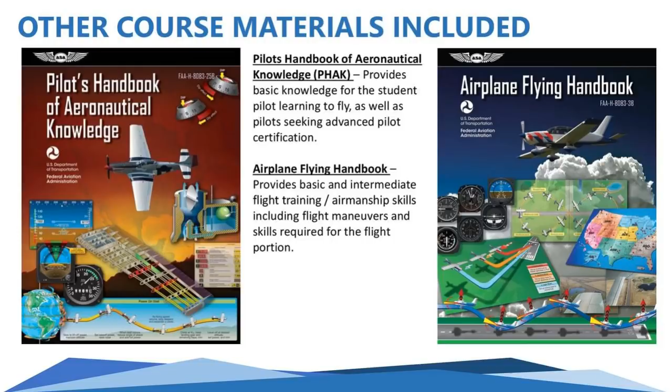Now, for those of you that have been outside of aviation for a long period of time, things have changed, obviously. We've got the wonderful world of GPS that is very, very prevalent nowadays, especially on the instrument side of things, but we do have these things called electronic flight bags. So back in the day, everybody had to carry around all these paper charts, and the charts would expire every 28 days or 6 months, depending on the different types of charts. And you'd see all these airline pilots carrying around big leather briefcases in the airports, and that's really no longer the case. When I was working at Compass, everything that we did was on an EFB, and the EFB basically gave us all of our charts on an iPad, right?

So this gives us all the information on VFR and IFR taxi charts. If you guys or gals have this, you can use this for this course. Once again, it's not a requirement. This is just the direction that the industry is going. It basically gives you the same, if not better, technology than what the airlines currently possess in terms of navigation and situational awareness. It also provides an electronic version of your logbook if you want one. And remember that ForeFlight is an Apple-only app. If you guys are non-Apple users, you can look up Garmin Pilot, which is the equivalent on the other side.

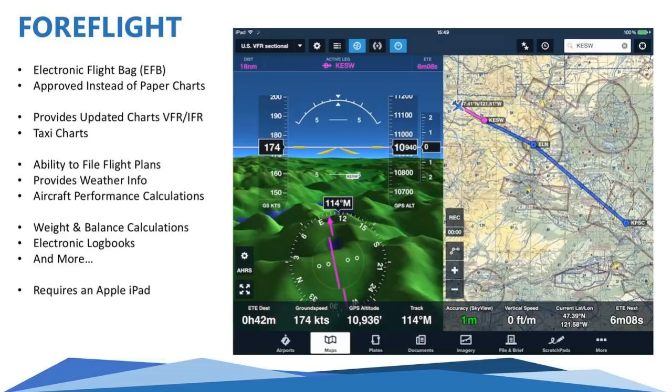That is the purpose of this class. Pass a knowledge test with a score of 70% or better. So once you guys receive that written endorsement, then you can go to an approved testing center, take that test there, and then once you pass the FAA test, those results are valid for 24 calendar months. So that means you've got 24 months in order to finish your flight training and take your check ride. If you don't finish it in that time frame, then you're going to have to retake that test.

Now, for the FAA written exam, my endorsement does not expire once you get it. So if you're a little bit younger, I know we've got some 11, 12, 13-year-olds in the class, just hang on to that certificate. And once you guys are old enough to sit for the FAA exam, then you can take it. Or if some of you guys are going to potentially start flight training a little bit later, or you want more time to study for the course, then you can take it at your leisure at another point in time.

So that's the differences between the two different types of schools here in the United States. The next thing I want to talk about is the ACS. The ACS is known as the Airman Certification Standards. This basically will tell you, the student, the instructors, and the evaluators what you must know and what you have to consider in order to pass the knowledge test and also the oral and the practical exam. Okay. So it's going to include 3 different areas. As we can see here, we've got the knowledge component, a risk management component, and a skills component.

Now, a lot of people don't understand how this works, but basically there's different objectives, and I've included a PDF copy of the full Airman Certification Standards on the website, so you guys can take a look at it. But this is how you're graded, right? So these are the things that you need to know. The way that it will work on your checkride is that the examiner will choose 1 knowledge, 1 risk management, and all of the skills, and it's really up to the examiner. Usually they're going to choose all of the risk management.

Okay, so what that might look like is, tell me what the privileges and limitations of a private pilot are, and then you would have to figure out how to explain that to the examiner and what they're asking for. And it says apply requirements to act as PIC under visual flight rules in a scenario given by the evaluator. All right, so there is no mystery in terms of how you're tested or examined by the FAA.

All right, now let's talk about those wonderful FAA medical certification requirements. So they suggest that you do get a medical prior to diving into flight training. Now remember, this is a free course, so there's really no obligation, but before you start spending a lot of money in flight training, I would recommend that you visit and get an FAA medical to make sure that you don't have any issues. You don't want to spend a few $1,000s and then realize that you can't fulfill your dream because something does come up.

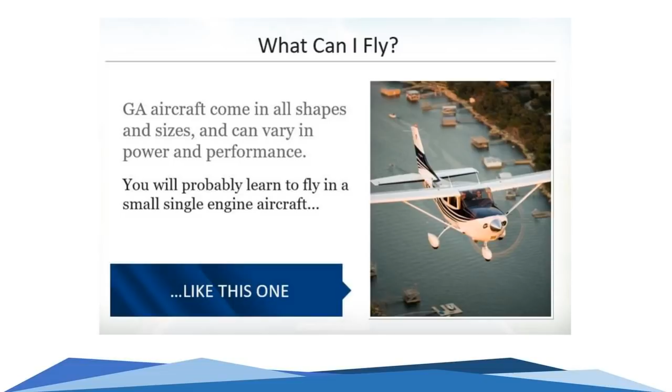All right, so what can you fly? So keep in mind that general aviation aircraft come in all sizes. Everybody here will probably learn in a single engine aircraft. This is a single engine land, meaning it can land on land. They also have versions of single engine sea, which would be a seaplane. In addition to that, if you've got the dough, you can do something faster like a Pilatus, right?

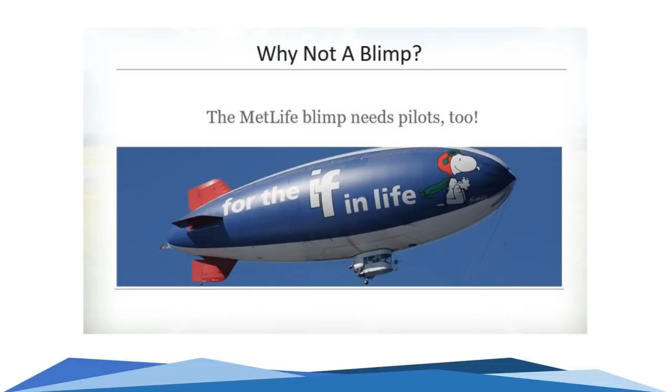And it's the same license, you just need some additional training or endorsements, which we'll talk about in the regulations section. Or if you want to fly a little slower in life, you can do the MetLife blimp, right? The blimps need pilots as well. And that's a different type that's called a lighter than air license. The other licenses and ratings that are available to you, and this is the general order most people would proceed. We are all here for the private pilot or some version of the private pilot or sport pilot. The private pilot allows you to fly.

The instrument rating allows you to fly in the clouds in sole reference to your instruments. The commercial, that's when you can actually start getting paid for what you do. If you have any inkling of teaching, that is the CFI, the Certified Flight Instructor. Now, to get from private pilot to commercial, you need 250 hours of flight time. There is no hour requirement for certified flight instructor except that you have your commercial. Now, for those of you that do not like teaching, just don't become a flight instructor. It's not worth it. You're going to do a disservice to the students unless you enjoy this.

All right. If you want to fly as pilot in command for any airline, Southwest, Delta, American, anything in between, UPS, FedEx, you're going to need what we call an ATP, which is an airline transport pilot license, which is what I have. And it's a minimum of 1,500 hours in order to get that. Now, once you get your commercial, most people are not paying for the flight time. That's when they're actually getting paid by a company in order to do that.

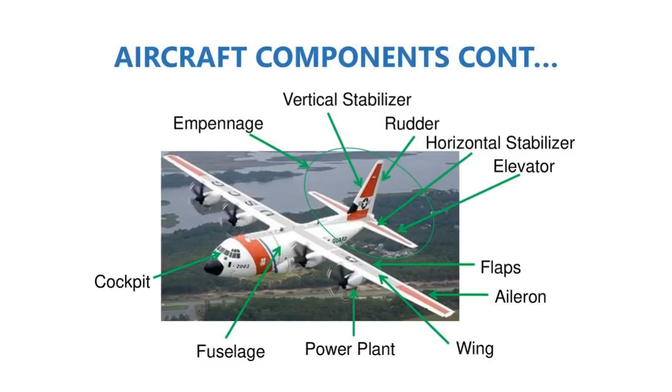Now, the way that these work in terms of a 3-axis system is we call this roll, yaw, and pitch, all right? So there's 3 different axes. There's the longitudinal axis, the lateral axis, and the vertical axis. So our wings, when we're rolling in a rolling motion, it is controlled by our ailerons, all right? So when we move the yoke right or left, it moves the aileron up or down, and that basically allows us to turn to the right or to the left, or what is known as roll.

When we look at pitch, which is basically pointing the nose up towards the sky or down towards the ground, we use our elevator, which is at the very back. Our elevators are located right there in the back along the horizontal stabilizer. And the ailerons are located on either side of the wing on the actual wing itself, okay?

Then the final axis is our vertical axis, and this controls yaw. So this is our rudder, and our rudder is along our vertical stabilizer as shown, and it moves in a yawing position. It kind of moves right and left, but it's slightly different in the way that it acts, all right? We'll look at each one of these in more detail here, okay? So let's look at those.

As mentioned, let's look at the first one here, which is going to be our pitch. So what we have at the very back of this is our horizontal stabilizer. And there's a little, it's called an elevator. And as we can see here, this elevator in an up position or a down position will basically pitch the nose of the aircraft up or down.

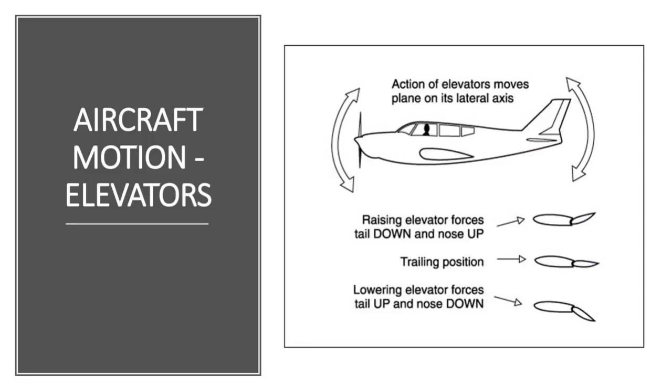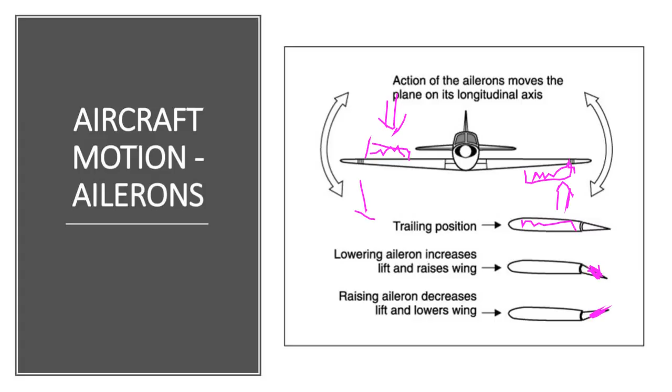What ends up happening is on the opposite side of the wing, remember that they are counter to each other. So if one is fully down, the other side is up. And when it's up, it's actually decreasing the airflow over the wing, which means it loses lift. So what's ending up happening is there's more lift on this side of the wing right here, and there is less lift on the opposite side of the wing, which basically makes this wing drop down and this one go up, okay?

The last one that we're going to look at is the rudder. So this is a top-down view of the rudder.

And yep, Glenn, you can use port or starboard if you really want to.

The rudder is giving us that yaw position. So the rudder, it's difficult to see, but the rudder is situated right here. And if we were looking at it, the rudder will deflect in the neutral position. It basically sits perfectly neutral and straight back. We can deflect the rudder right or left, and we do this by using our foot pedals. And if we basically step on our right foot pedal, then it will move the rudder to the right, and so forth. And then it will give you that opposite force.

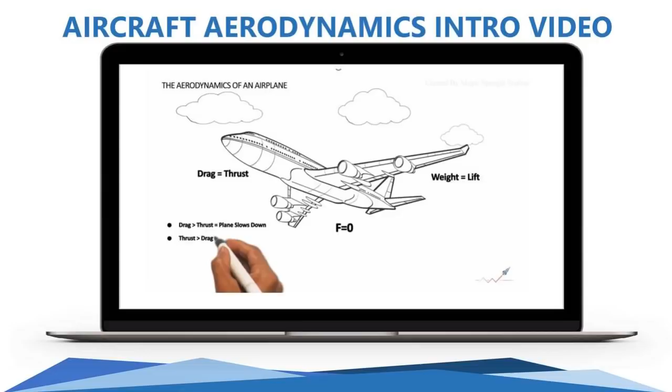Okay, so that's basically keeping us coordinated, which we'll talk a little bit more about in future lessons. But we don't really talk very much about how to fly an airplane. That's the general controls of the airplane. All right. So with that, before we actually dig into the aerodynamics section, I'm going to give you guys a very easy 7-minute video here. It's going to talk about the basics of aerodynamics, and then we'll dig into it and talk about it in more particulars. So let's go ahead and throw that up.

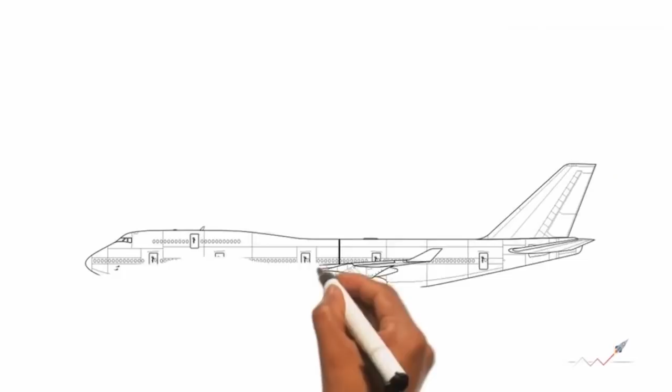If you have ever flown on an airplane, you know that it's an enormous-sized, amazing machine. A typical 747 can carry more than 500 passengers and weighs around 800,000 pounds when taking off. Yet it rolls down the runway at a speed of 290 kilometers per hour and, as though by magic, lifts itself into the air and can travel up to 13,000 kilometers without stopping. Incredible, isn't it? Today, we are going to learn how an airplane flies in a very simple way by going through the aerodynamics of an airplane, the main parts of an airplane, and controlling the airplane. The aerodynamics of an airplane. The 4 aerodynamics of an airplane are drag, thrust, weight, and lift.

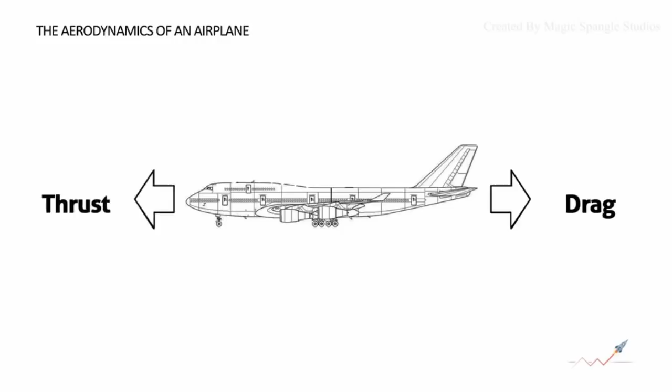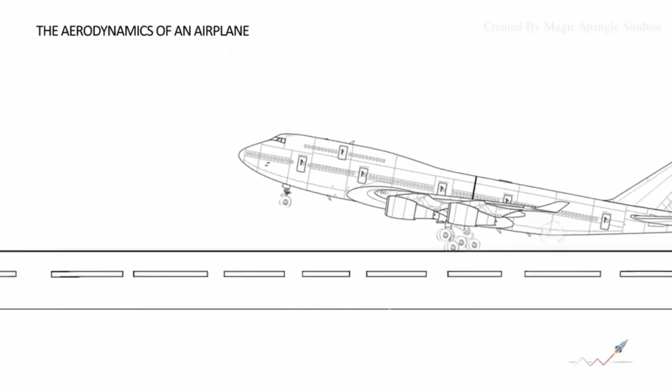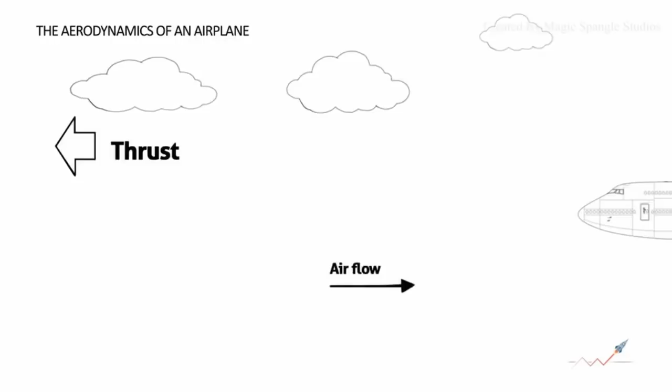Drag, also called air resistance, refers to the forces acting opposite to the relative motion of any object moving with respect to a surrounding fluid. The energy it takes to push through the surrounding fluid creates drag. You may have noticed an excellent example of drag reduction in track cycling. The cyclist must push through the mass of air in front, but a streamlined sitting posture that cuts through the air more smoothly enables a cyclist to travel much faster, with less effort. The airplane always retracts its landing gear and nose gear into the body of the plane after takeoff to reduce drag. Thrust counters drag. It is a mechanical force that keeps the airplane moving in the air.

Thrust is generated by propellers, jet engines, or rockets. The compressor inside the jet engine takes the air and compresses it, and after processing from the combustion chamber and turbine, the gas is blown out through the exhaust nozzle. Here, Newton's third law of motion is applied, where the gas is pushed backward and the engine is pushed forward. Weight is the airplane body, passenger, and luggage weight in total.

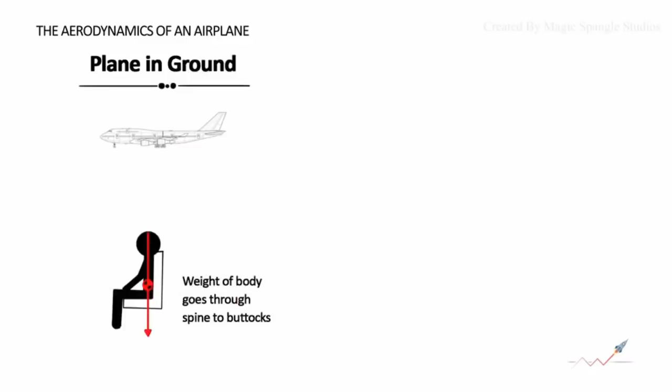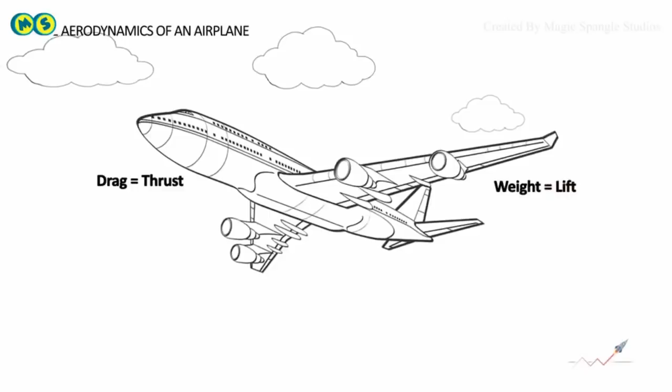Lift overcomes the weight and holds the airplane in the air. Lift is created mostly by wings to keep the plane aloft. So, to keep the airplane moving, flying straight, and level, this must be true, which means no net force acting upon an airplane.

In any case, if drag is greater than thrust, the plane slows down. If thrust is greater than drag, the plane moves faster. If weight is greater than lift, the plane descends. If lift is greater than weight, the plane climbs.

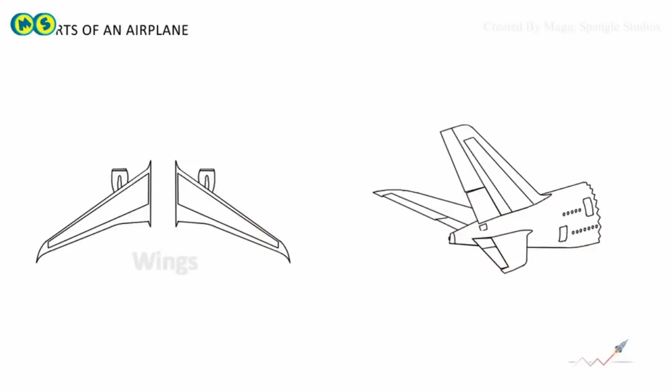Parts of an airplane. The basic parts of an airplane are 1. wings, 2. horizontal stabilizer, and 3. vertical stabilizer. The wing is the most important part of an airplane, since it produces lift that allows a plane to fly. A wing produces lift because of its slightly inclined and special shape, which is called an airfoil.

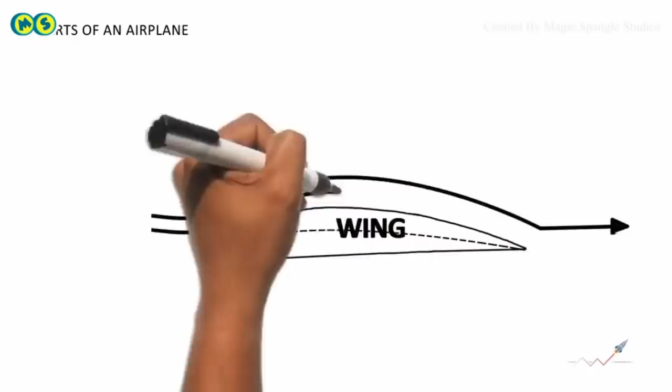This special shape is designed to deflect the air at the bottom of the wing due to more air striking the bottom and less air at the top of the wing. As the airplane rolls down the runway, higher pressure and more upward force is produced below the wing, and lower pressure and lesser downward force above the wing. The net result is the lifting of an airplane.

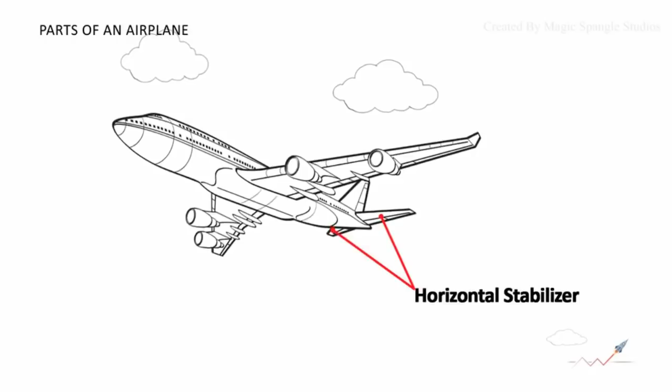Stabilizer. Stability in an airplane is a tendency to return to its initial state after a disturbance from that state. Horizontal stabilizer performs this function when the disturbance force causes the nose of an airplane to move up or down. Such movement is called pitch. Vertical stabilizer provides stability for a disturbance in yaw. Yaw is side-to-side motion of the nose.

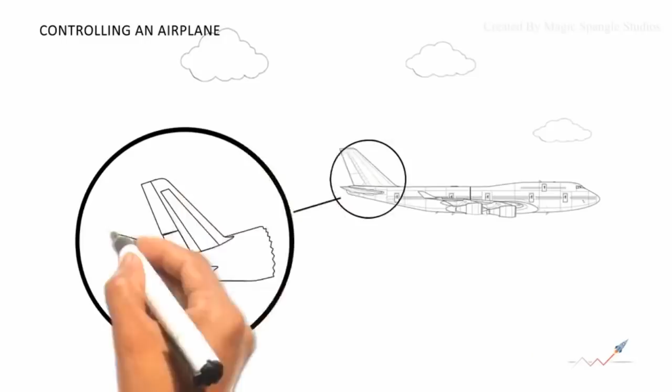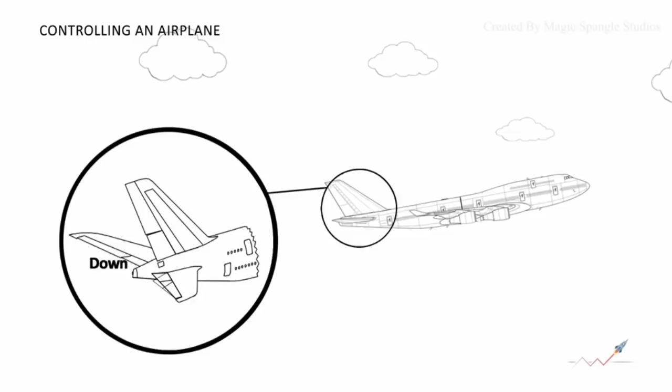Controlling the airplane. So what are the components in an airplane which control the flight, direction, and height, and maintain the equilibrium? It's elevator, rudder, and aileron. The elevator can be deflected up or down to produce a change in the downforce produced by the horizontal tail. If the elevator is deflected upward, it increases the downforce produced by the horizontal tail, causing the nose to pitch upward. If the elevator is deflected downward, then the counteracting force causes the nose to pitch down.

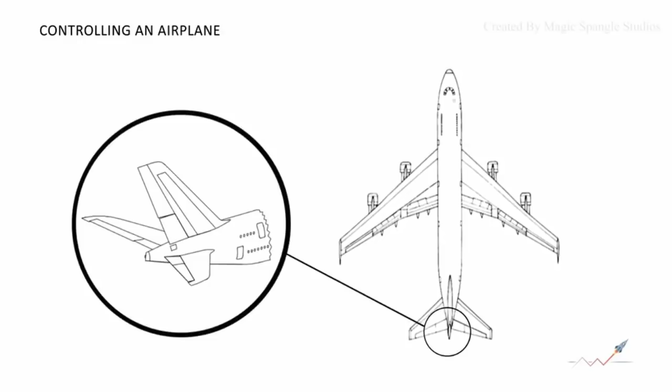The rudder can be deflected to either side to produce a change in the side force produced by the vertical tail. If the rudder is deflected towards the right, it creates a side force to the left, which causes the nose to yaw to the right. If the rudder is deflected towards the left, it creates a side force to the right, which causes the nose to yaw to the left.

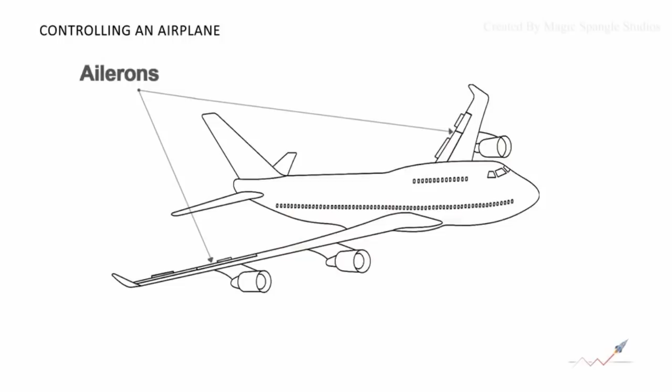Ailerons are located on the tips of each wing. Ailerons can be used to generate a rolling motion for an aircraft. Ailerons usually work in opposition. If the right aileron is deflected upward, then left is deflected downward, and vice versa. Let's see this. To curve the flight path, the pilot deflects one wing to move up and the other wing to move down by controlling the ailerons.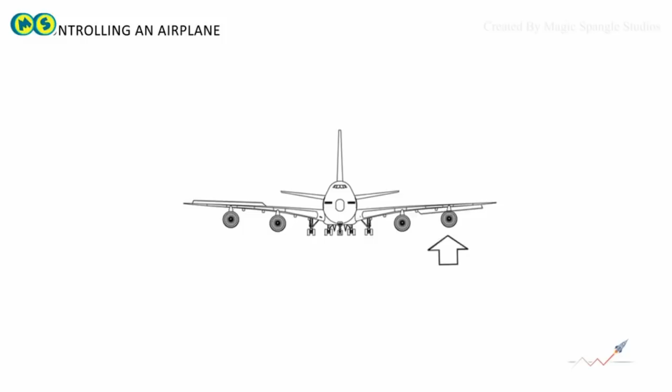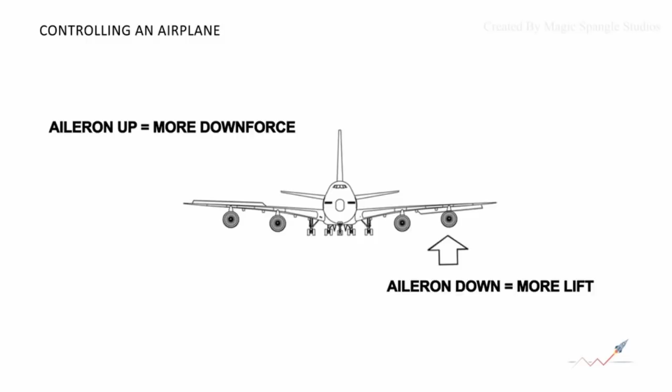With the left aileron in downwards direction, the lift will increase, whereas at the same time, the aileron of the right wing is in the upward position. Therefore, lift on the right wing is decreased. The result will roll the aircraft to the right. If the pilot reverses the aileron deflection, right aileron down, left up, the right wing will lift up and the airplane will roll to the left. The next time you travel in an airplane, you'll know how it works.

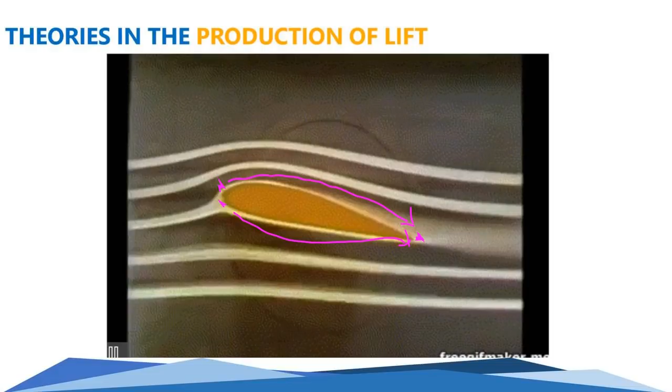So one is gonna split and go on the top portion of the airfoil, and one is gonna go underneath, and they have to meet at the exact same point in time. We'll dig into this a little bit more, but the top one is going to speed up because it has a further distance to travel, and the bottom one is going to remain that same speed. But before that, we're going to do some basic physics. Hopefully everyone remembers who Newton was. There's three different laws that we worry about.

So Newton's first law, and I will promise you guys, I got very creative when I created this slide deck almost 2.5, 3 years ago. This is the only slide deck that is color coded. I'm just checking your color vision, if you will. None of the other ones are like this. It's not as annoying. It just took way too much time, okay?

Newton's first law, every object will remain uniform unless acted upon by an external force. So basically an airplane will move when a force is applied to it, right? So if we push a ball or anything across our desk, then it will move. The second law is force equals mass times acceleration. The example of this is the more force applied, the faster it goes. So if we put a jet engine on something, it's obviously going to move a lot faster than a prop on the same device.

And the most important one is Newton's third law, which is for every action, there is an equal and opposite reaction. And what we're going to talk about towards the end of the class is that these propeller-driven airplanes have a left-hand turning tendency, meaning that the airplane naturally wants to move to the left because of this equal and opposite reaction. And there's a few different left-hand turning tendencies that we'll talk about, including P factor, all right? Then we're going to talk about Bernoulli, or Bernoulli's principle.

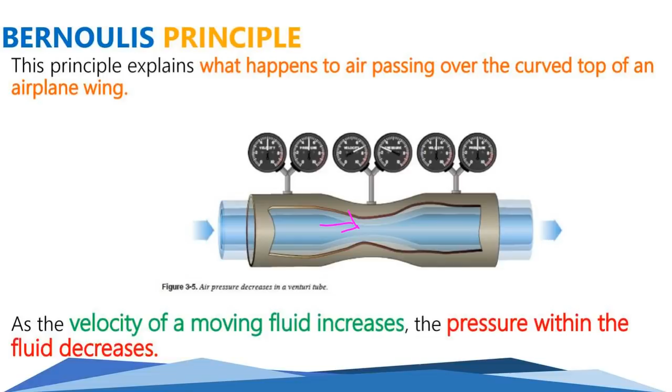So when it goes through this venturi, the pressure will decrease, but the velocity will increase, right? So pressure will decrease, and the speed of that air will increase when it goes through a smaller opening. So as we stated at the beginning, when we're talking about lift or what makes an airplane fly, we have these upper and lower surfaces. So if we have those two air molecules, molecule A and molecule B here, they have to meet at the very back end at the exact same moment.

But if we took a string and measured the distance from the top or the bottom, what we would notice is that the top part, which is known as camber, that's the curvature of the wing, molecule A has a further distance to travel to get to the back of the wing versus molecule B, which has a shorter distance. Because of that, it has this low pressure and it actually starts to increase in speed. That increase in speed and that low pressure is what gives us lift. That's probably the easiest way that I can explain it, all right?

So when we're talking about the shape of a wing, this is what we call camber. So the camber, this is the upper camber, which is the shape of this top portion. Then we have a lower camber, which is the shape of the bottom portion, all right? The lower surface has less camber, so it's basically, as you can see, roughly a straight line versus look at the curvature of the upper portion of the airfoil, and that's the reason why we get that lower pressure. So we get a faster speed on top and a lower pressure, and on the bottom we get a slower speed and a higher pressure.

What that creates at the end of the day is lift, and lift is what basically lifts us off the ground, okay? The way that these are designed and the way that it was created is lift. You'll hear this thing, Rod likes to use this a lot, the wing is the thing. The wing is the thing that allows us to fly. It's the shape of that wing that allows us to develop lift and to fly the airplane. And there are a multitude of different shapes of wings out there. We've seen some that kind of defy the laws of gravity, especially in the experimental planes that NASA used to put together.

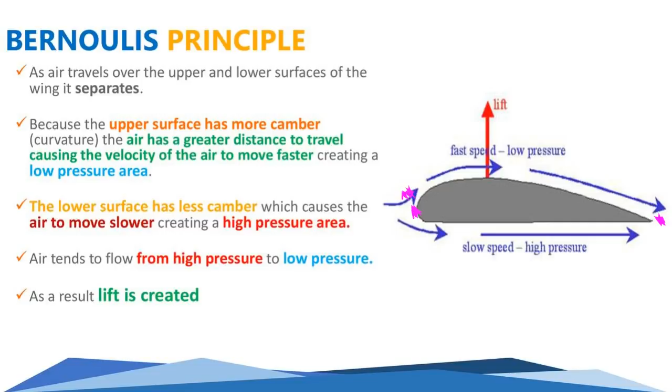When we're saying meeting, what we mean by meeting is that if in an imaginary world we had two air molecules, one here, and they're at the leading edge of the wing, they both have to meet at the trailing edge of the wing, meaning that they have to travel a distance in order to get from point A to point B, all right?

This is the big one. So this is an FAA test question. They're going to ask you to define angle of attack. So angle of attack is the difference between the relative wind and the chord line, or the angle between the relative wind and the chord line. We'll look at it in a little bit more detail, all right?

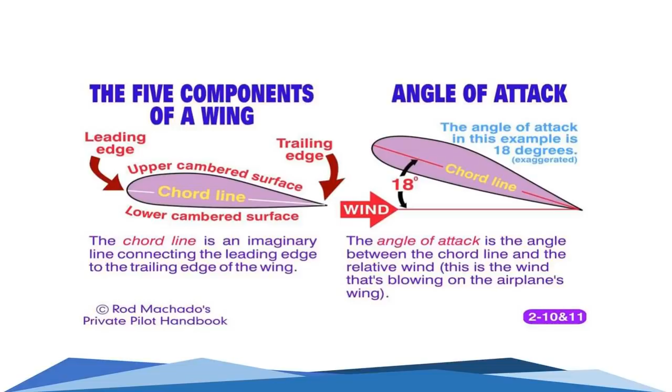So with that, let me ask you a question about Bernoulli. Make sure that everybody's still here. All right, so which statement relates to Bernoulli's principle? Is it A, for every action, there is an equal and opposite reaction? Is it B, an additional upward force is generated as the lower surface of the wing deflects air downward? Or is it C, air traveling faster over the curved upper surfaces of an airfoil causes lower pressure on the top surfaces?

Yep, and that's more of a figurative thing. It's very easy to explain. Obviously air molecules are not meeting in real life. It's just a very simplistic way of thinking about it, kind of like a children's book, right? One air molecule has a greater distance to travel than another. And if it has a greater distance to travel and it needs to be at the same bus station, if you will, or train station as the slower moving molecule, it's got to go faster, right? That's a very simple explanation, but as mentioned, it is just more of a figurative speech. It's not a literal interpretation.

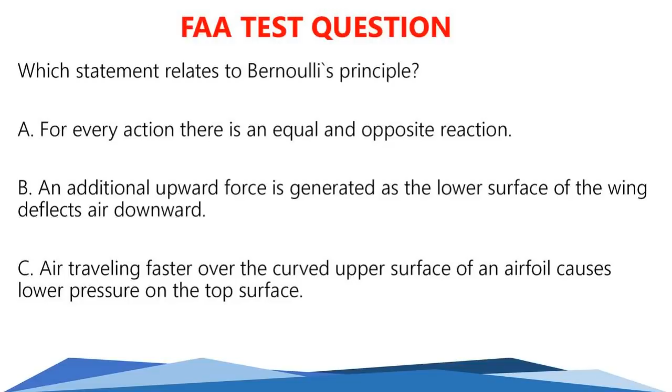All right, so let's go ahead and go through the answer here. The correct answer is C. It's air traveling faster over the curved upper surface of the airfoil causes lower pressure on the top surface, right? The lower pressure on top gives us that lift because we have a higher pressure on bottom. So 88% of the class got that correct, right?

Got one more FAA test question for you, and then I will give you the chat back here in just a moment. So the term angle of attack is defined as what? As the angle A, between the wing chord line and the relative wind, B, between the airplane's climb angle and the horizon, or C, formed by the longitudinal axis of the airplane and the chord line of the wing.

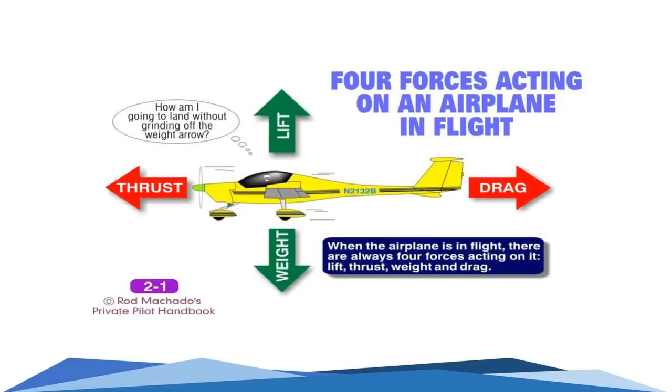All right, so let's talk about the first one, which is thrust. Okay, so thrust is provided by the engine, and the engine has the propeller on it. Remember, a propeller is just another version of an airfoil, and that propeller is converting that power into thrust and it's pulling the airplane forward, okay? The thrust is acting parallel to the longitudinal axis. However, it's not always the case. We'll talk about that in the next slide here. So that is what thrust is.

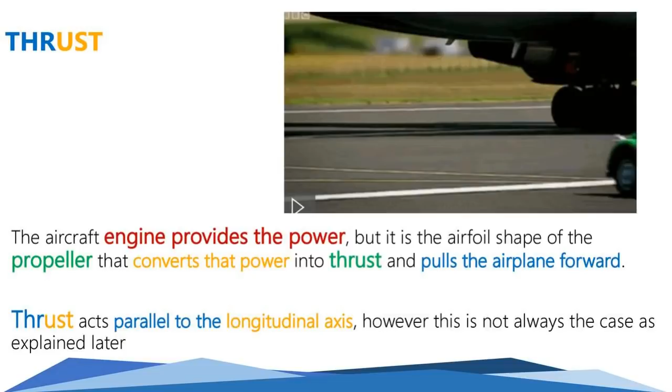The next one we want to talk about is drag. So drag is the opposite of thrust. And there's two different basic types of drag that we're going to talk about. Drag is just something that resists the movement of the actual airplane itself, okay? So the two types of drag that we're going to be discussing in this class are known as parasite drag, or parasitic drag, if you will. And then we have induced drag. So within each one of these, there are subcomponents or smaller versions of drag as well.

Okay, so parasitic drag or parasite drag is basically not associated with the production of lift, and it increases as airspeed increases, okay? So these are things that naturally stick out from the wing. So this could be bolts, screws, anything that's basically disturbing the airflow going around or over either the wings or the aircraft, right? So the faster that we go, the more parasite drag that we have.

Induced drag is slightly different. So as airspeed decreases, what we have here is that it's inverse with our airspeed. So drag caused by the same factors that produce lift, its amount varies inversely with airspeed. And I'll show you what the drag lift curve looks like here in a second to kind of put it in perspective. It's gonna be a little bit easier to look at that way.

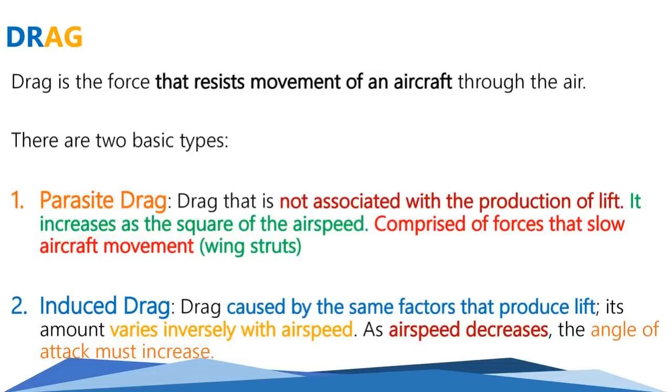All right, let's look at parasitic drag first. So there's a few different types. We have form drag, which is a version of parasite drag. So this is anything that sticks out into the airstream. This could be wheels, antennas, rivets, just anything at all. We have interference drag, which comes from the intersections of airstreams that cause eddies, currents, turbulence, and restricts any type of smooth airflow. This could be at an intersection where, let's say, the wing and the fuselage meet. So that's what we call interference drag.

And then we have something called skin friction drag, and this is just any type of resistance due to the contact of moving air with the surface of the aircraft. Actually, by waxing the airplane, you can actually increase your airspeed by about five knots or so, just because it gets rid of that skin drag.

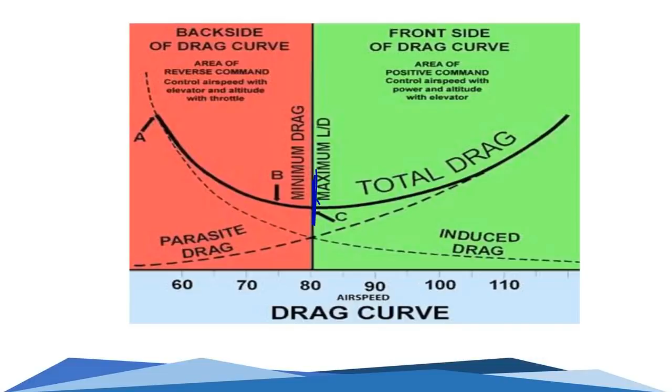So drag is the price that is paid to obtain lift. What we always talk about is the lift to drag ratio, which is the amount of lift generated by an airfoil compared to its actual drag. And then the lift to drag ratio is going to show airfoil efficiency. And we always call these an L/D ratio, which is basically whatever is most efficient for that specific airplane.

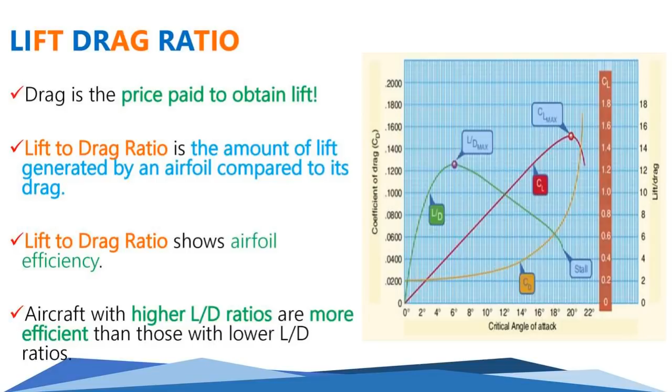So when we look at a drag curve, what we have is as the speed increases, which is going to be right here, this is the parasitic drag line. As speed increases, the parasitic drag will start to increase exponentially. You'll see that the drag goes up pretty high. The induced drag, though, which is over here, is actually working the opposite. So as we increase in speed, the induced drag is going down. What we have in the red line, which is known as total drag, is basically the total between the parasitic and induced drag. This is what we call our total drag, okay?

So the bottom of the drag curve is always going to be the most efficient speed at which the airfoil can generate maximum lift and minimum drag. So right here where the parasitic drag and the induced drag meet, that is our most efficient, where we generate maximum lift and minimum drag. And this is our speed that the manufacturers give us for our maximum glide distance. So if we ever lost an engine, you're going to have an airspeed that you want to fly, and the airspeed is basically right where the parasitic drag and the induced drag meet. And that will basically give you the furthest distance, if you will.

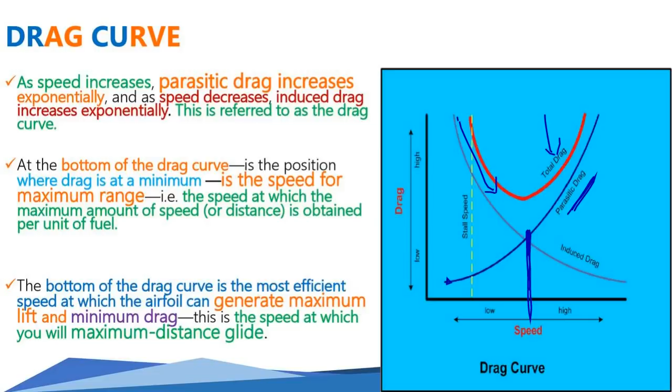Yep, it will count as your attendance.

Thank you. All right, so if we were to look at this in another way, just giving you a few different visual options to see how this works. As mentioned, your max range, which is the furthest distance that you can go, is where the parasitic drag and the induced drag meet. On the other hand, if we're toward the back side of the power curve, which is over here, this is what is considered max endurance. So this is just an example. You don't need to know this. We have aeronautical engineers that calculate all these numbers, and this is how they're calculating it, all right?

All right, let's talk about weight.

And if you're having trouble connecting, go ahead and just exit out and then go back, all right? As I said, it will always happen. It's just something that naturally happens because it's technology, okay?

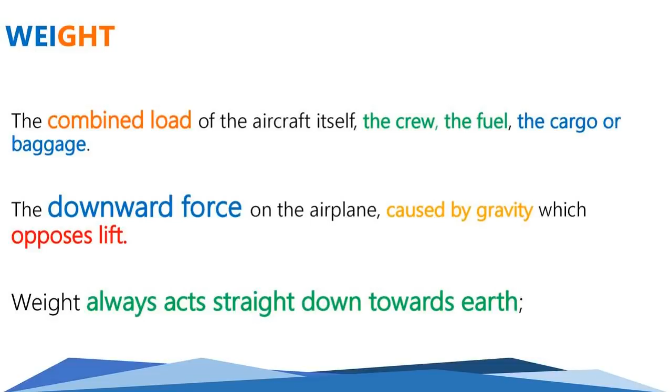All right, let's look at weight. So weight is the next thing. Remember, weight counters lift. So weight is the combined load of the aircraft itself. So this is when we talk about crew, fuel, cargo, anything that's basically the weight of the aircraft, right? And it's the downward force of that airplane that's caused by gravity, which is opposing lift. So lift is the important one. Weight is the one that counteracts it. And weight is always acting straight down towards Earth. So keep that in mind.

The next one we talked about a little bit, which is lift. Remember, lift counteracts weight. So lift is opposing the downward force of weight and is produced by the dynamic effect of air acting on the airfoil. So remember, the air going over the top part of the wing is moving faster, and it's a lower pressure than the air on the bottom side of the wing, which is a higher pressure, and it is moving slower. So by doing that, that is producing lift, all right? So we all good so far? So those are the four forces. The four forces are equal in unaccelerated level flight. That's one of your FAA test questions.

The next thing that we're going to talk about is wingtip vortices. So wingtip vortices are created any time that we are creating lift. So anytime that lift is created, it's almost a byproduct of lift. And what it is, is this spiraling airflow that basically extends off of the wingtips. I'll show you what that looks like here in a second. So if we were to look at a wingtip vortice, this is what it would look like, and you're not going to be able to see it unless, you'll usually see this if airplanes fly through clouds or fog or something like that. And what it is, it's basically this spiraling airflow that comes off of the wingtips.

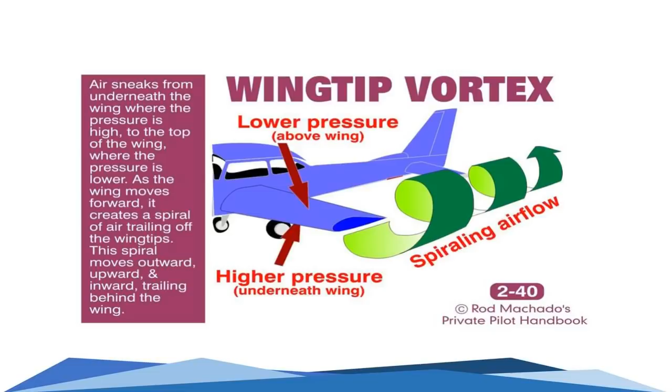All right. Now, the reason why wingtip vortices are so important is that this is where we usually get something called wake turbulence, right? If you've ever been flying on a commercial airplane and you're coming into land and you start to feel the airplane start to have some turbulence close to the ground, it's probably because it's flying behind an airplane that's creating this, all right? So here's just another version of it. As we can see, this is a version of aerodynamic drag, but we'll talk about the specific formations of the vortices. But remember that any of these wingtip vortices are going to pose a hazard to aircraft, especially during the landing and takeoff phases of flight. Okay, so keep that in mind. So it's going to be the most crucial when we're taking off and landing.

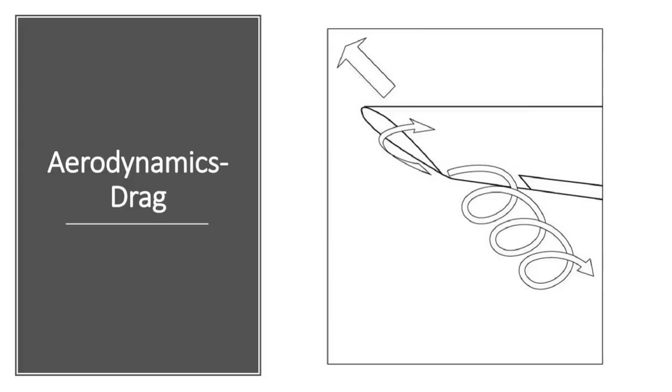Now, the strength of the vortices is a function of the aircraft's size, speed, and configuration. So what we usually like to say is that aircraft that are heavy, slow, and clean are going to create the strongest wingtip vortices. So heavy, just think of a heavy airplane. So a Boeing 747 or an Airbus A380 is the heaviest that we have, right? When it's slow, it is creating the most amount of wingtip vortices. So think about it, when are aircraft slow? They're slow when they take off and when they land.

And a clean configuration means that the wing flaps and the gears are retracted, meaning that there's nothing sticking out. If we say a dirty configuration, that would be when the gear's down and the flaps are down. So when we take off, that is probably the worst position where it's heavy, slow, and clean, because the airplane has already brought up its flaps and it's also brought up its landing gear. It's still just as bad on landing, though, so keep that in mind.

Now, the reason why we're talking about the formation of wingtip vortices is it leads to this thing called wake turbulence, all right? So wake turbulence is what causes turbulence in the air when we're following behind these vortices, and this is what can really affect us as small general aviation pilots. And even when I was flying the Embraer 175, when we were flying behind certain airplanes, this thing just kind of rocks you back and forth, and it kind of does weird things, especially going into LA all the time.

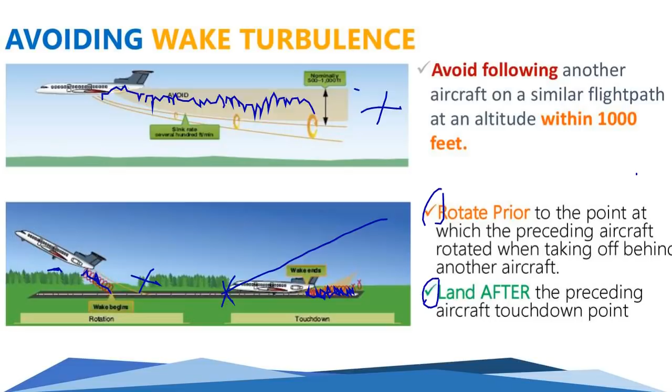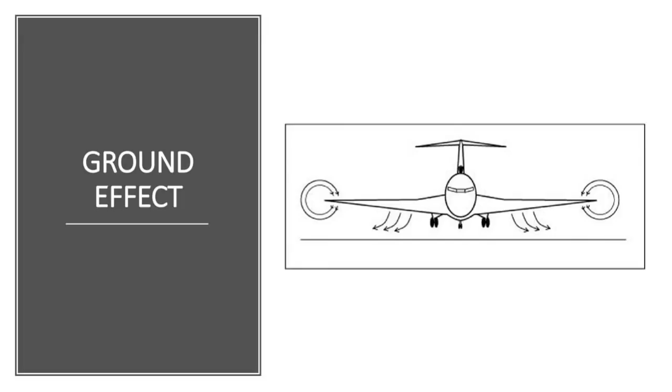All right. Let's look at ground effect. So ground effect is basically where we have this artificial improvement in performance, right? It's going to allow us to get off the ground a little bit earlier than what is really possible. And what I mean by that is that we have rotation speeds, meaning when we're going to pull back on the yoke, and we usually need to maintain a specific speed in order to keep lift, right? We need to counter that weight by creating that lift force.

So let's look at ground effect here. Ground effect, as mentioned, is that artificial improvement in performance, if you will, and it's usually going to be within one wingspan of the ground. So for most general aviation aircraft, you're going to experience it within about 10 to 15 feet of the ground, depending on how big your wings are. And this happens when you're taking off and/or landing.

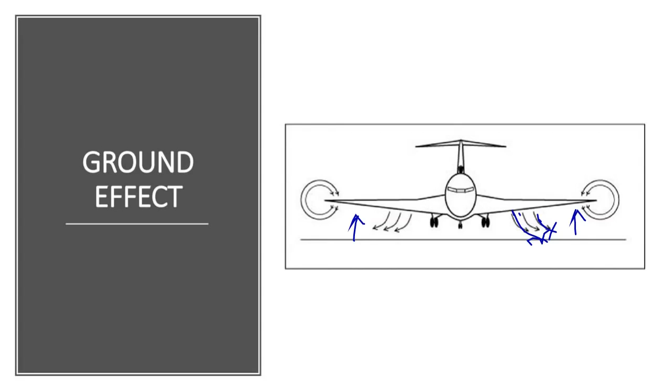So it's simply a reduction in that induced drag. And the reason why is that we have that airflow from the aircraft, and normally that airflow is just kind of falling off that airplane. But what ends up happening, I'll go back to the other slide, is now it's actually hitting the ground, and it's basically providing this cushion that's kind of holding you up, if you will, right? And those wingtip vortices, the upwash and the downwash, are really what's giving you that ground effect, okay? We'll look at a few different examples to explain it a couple different ways, okay?

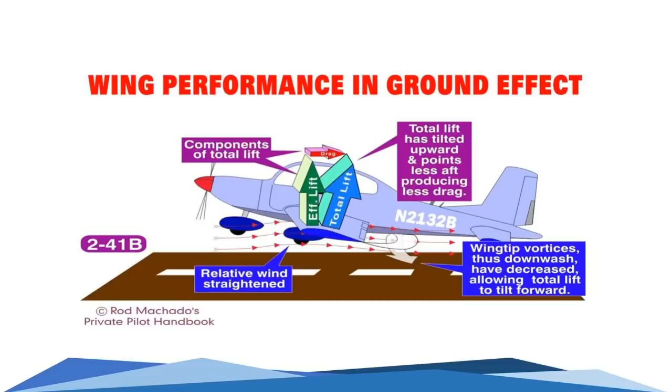But the biggest thing here is look at where the total lift is. The total lift kind of moves forward on the wing versus where it was at before. It was actually a little bit further back on the wing when we looked at it out of ground effect. So the way that this changes our pitch, if you will, is it's dependent upon obviously where we are. So if we're in ground effect or we're not in ground effect.

So when we're talking about the downwash, let's look at the first one. So in position A, the nose is kind of held up by this wing performance, right? Out of ground effect. So what we have is the airflow comes up, over, and it's hitting the back of that horizontal stabilizer. And that is pushing that tail, which is giving us that nose up.

When we get into ground effect, what ends up happening is that downwash that we would normally expect to have diminishes or decreases once it gets into ground effect, and it's no longer really pushing that tail down. So naturally what's going to end up happening is the nose is going to want to come down, right? So that's how the pitch changes.

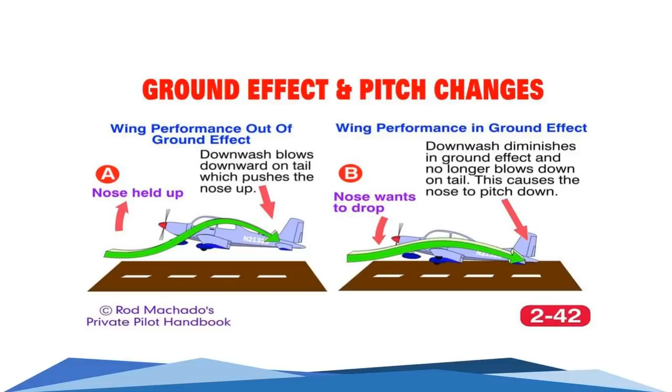Now, that is above and beyond what you need to know, but I will give you the test question. And with that test question, what is ground effect? All right, let me go ahead and bring up the poll here. Just what is the definition of ground effect? Try to answer in the poll, please. Is it A, the result of the interference of the surface of the earth with the airflow patterns about an airplane? B, the result of an alteration in airflow patterns increasing induced drag about the wings of an airplane? Or C, the result of the disruption of the airflow patterns about the wing of the airplane to the point where the wings no longer support the airplane in flight?

If you really want to answer in the chat, just make it private so you don't have to send it to everybody, guys. I guess I'll have to put a tutorial out for how to answer on polls.

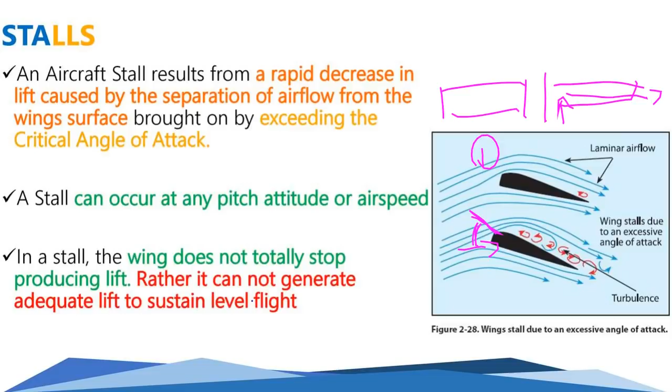All right, so the stalling speed of an aircraft is never going to be a fixed value. It will always stall at the same angle of attack, regardless of airspeed, weight, load factor, or density altitude. So the critical angle of attack is the angle, right? If we were to look at an airfoil, it is the angle between the chord line and the relative wind, okay? So that's known as a critical angle of attack. It's where the airflow separates from the upper surface of the wing, and that's what causes the stall, okay?

So as mentioned, I don't really go with 16. I usually say 18 to 22 degrees is usually where, depending on aircraft design, it will occur. And the biggest thing is that it can occur at low speed, high speed, or in a turn. So it can occur at any point in time, all right? We call it critical because it's basically at that point where it can't produce lift anymore, or it can't produce enough lift.

So let's look at these 3 different events. We've got a low speed, a high speed, and a turning. So in a low speed, this is when we're practicing stalls, or this could occur when we're either taking off or landing and we're not paying attention to our airspeed, right? The lower the airspeed, the higher we must increase the nose up pitch in order to maintain that altitude, right? So when we start pitching up, that's what increases the angle of attack.

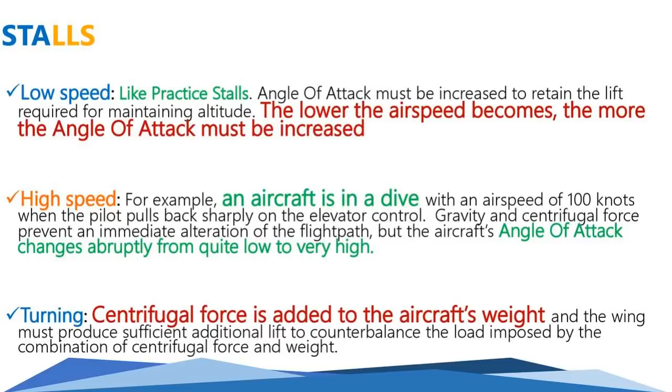So with that, got one test question, then we're gonna go into stability. So let's go ahead and look at this real quick here. Let me pull this one up. Try to answer in the poll, please. All right, during a spin to the left, which wing is stalled? Is it A, both wings are stalled, B, neither wing is stalled, or C, only the left wing is stalled?

Give you guys another couple seconds on that. I did pause the chat. Hopefully it is working this time when I pause it.

So we've got a little bit of split in the class, right? During a spin to the left, which wing is stalled? Okay, so if we were to think about this, kind of a trick question in a way. 57% of the class is saying C, and unfortunately that is not the correct answer. It is actually A. Correct answer is A. So we've got about 37% of the class with A.

Now, anytime that we're in a spin, both of our wings are going to be stalled, but one wing is going to be more stalled than another. So that's the only thing. So you can either think of it as one wing that is less stalled than another or one wing that is more stalled than another, but one is having more of an effect than another. And that's generally the direction that the spin goes in, all right? But keep in mind that both wings are stalled in that circumstance, okay?

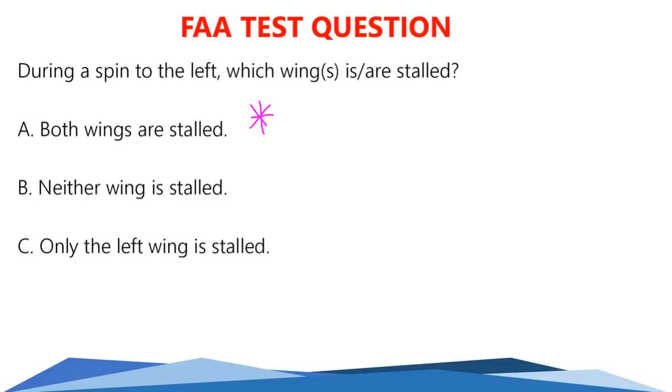All right, so James was asking a good question, which is basically a spin to the left. Like, what do you mean by a spin? Yeah, that's a great question. Let me go ahead and show you guys real quick here. So if we have an airplane, when we're talking about a spin, when we stall an airplane, we're going to basically pitch up, and we're going to exceed the critical angle of attack, meaning that we're going to lose enough airspeed. We're going to exceed that critical angle of attack, and then usually one of the wings will drop. Okay, if we don't recover it, it will go into what is called a spin.

So a spin is literally as it sounds. The nose will come down and it will actually just start doing a spin like this. Okay, usually the aircraft will spin once every 2 to 3 seconds. We actually go through this in flight instructor training. It's a requirement, and usually the problem with this is that one wing is stalled more than another, but both wings are actually stalled at that point.

I will share with you guys a video next time of a spin. There's a good video out there, or if you want, just go on YouTube and type in Cessna spin, and you'll see the actual aircraft spinning, and this is considered a stalled state. So the way that we break that is we have to figure out how the heck do we reduce the angle of attack, right? Even though we're pointed straight at the ground, we actually have to push the aircraft even further down to break that angle of attack to get the airflow to go over those wings. And then, yep, 2 to 3 seconds.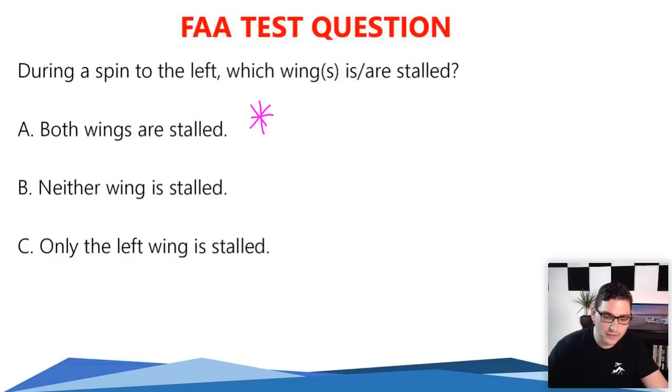All right, let's talk about dynamic stability. So we have what is known as static or dynamic stability. Stability is really the ability of the airplane to return or not return to its original flight condition. So static stability is what is the airplane initially going to do? What is it going to do if we were to pull up and let go of the yoke and not touch it?

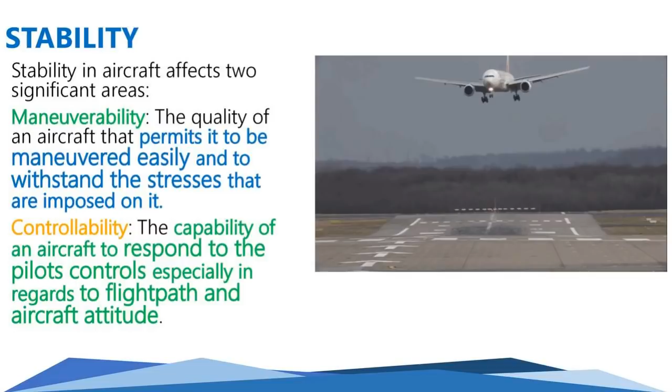So one thing that we want to think about is, what is an airplane that is inherently stable? Is it one that is more controllable or less controllable, or more maneuverable or less maneuverable? Remember that controllability, once again, is the capability of an aircraft to respond to the pilot's controls, especially in regards to flight path and attitude, okay?

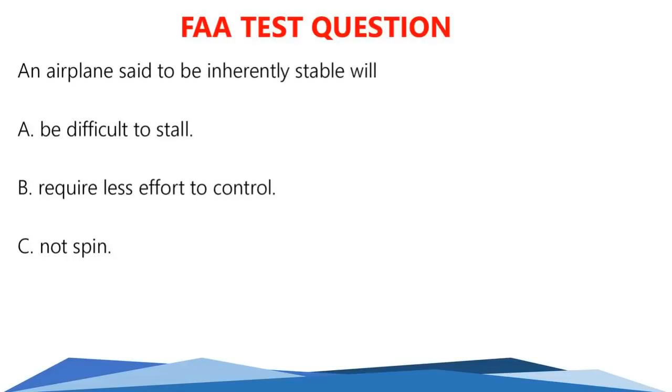Good job, everyone. We are almost done. We just have a couple left-hand turning tendencies, about 7 or 8 more slides. So I appreciate you hanging in there. I told you this is not a watered down course, for those that thought it was. I apologize, but we're going to keep it honest here.

So let's go ahead and talk about left-hand turning tendencies. Remember, in Newton's third law, for every action, there's an equal and opposite reaction, right? The left-hand turning tendency of an airplane is made up of these elements. There are 4 elements, but we're just going to talk about 3 because the 4th one is a CFI one that I removed. The first one is torque reaction, which is the opposite reaction from the engine and the propeller. We've got a corkscrewing effect from the slipstream. And then we have something called P factor, which is a simplified way of saying asymmetric loading, okay? These are the 3 that we want to talk about as private pilots.

So the first one is torque reaction. Any time the engine is running, if we're sitting in the cockpit, we'll notice the prop is going to rotate to the right. So the airplane's natural reaction is to go in the opposite direction and roll to the left.

So by doing that, what will end up happening is, in order to kind of counteract that, we get also a yawing condition when we take off, and we have to apply opposite rudder.

You'll see a lot of people in the chat. Sorry, I forgot to unmute the chat, everyone.

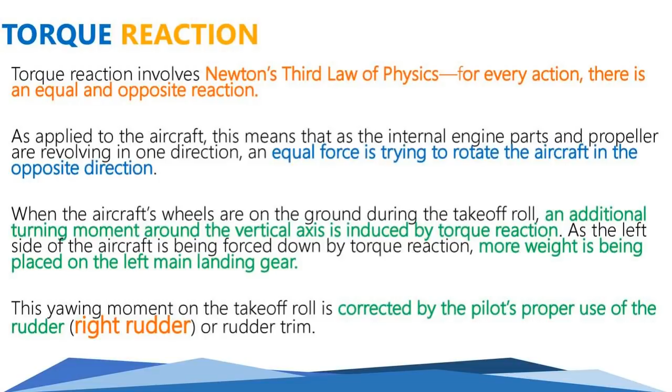A lot of people in the chat basically stated that you step on the ball, and that is correct. That is the whole purpose of it. So let's look at a very simplified version of that for engine torque. We've got a prop that's rotating to the right, if we were to look at it from the cockpit, and that airplane's natural reaction is going to want to roll to the left, okay? So that is the reason why we've got one set of left-hand turning tendencies.

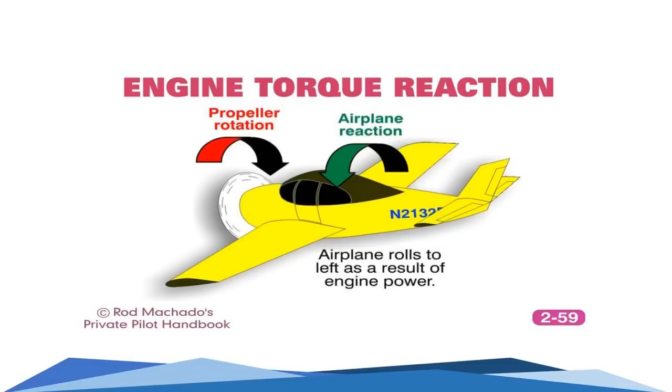All right? So with the air that's pushing on the left-hand side of the vertical stabilizer, the butt of the airplane is going to want to go to the right, which means the nose is going to want to go to the left, all right? Now, this is more apt to occur at slower speeds, and this is just because the air becomes more compressed.

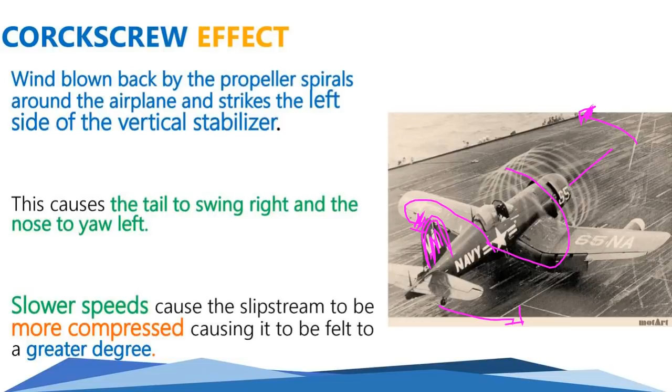All right, last one here is the P factor, which is asymmetrical loading. We always just call this P factor. So once again, a propeller is just another version of an airfoil, okay? An airfoil of any type, whether it's a wing or a propeller, can stall, just like anything else. So what we like to think about is, at a high angle of attack, the load on the downward moving prop blade is a bit more.

And I'm actually just going to go to the next one because I like this one a little bit better in terms of an easier look at P factor. P factor is a very easy way to explain the bite. What we mean by bite is how much of that prop is grabbing the bite of air, if you will. How big is that bite? How much air is that prop actually grabbing as it pulls us through the air, okay?

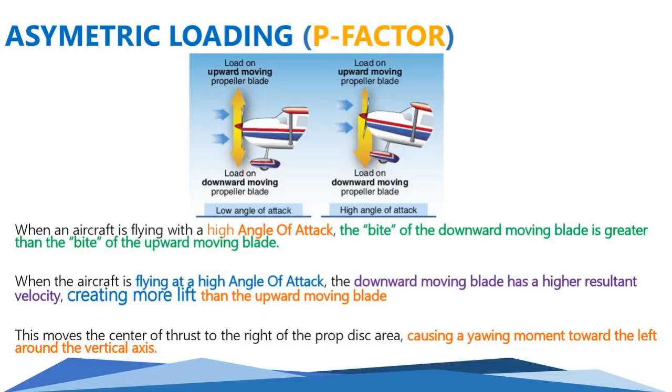So as it grabs the bite of downward moving air, because remember the blade is moving downward. The blade that moves downward is actually moving at a faster rate than the ascending blade. That's an easier way of thinking about it. We'll get it here in another version.

All right, so when we look at a propeller and the relative wind, this is just a way of looking at it where we've got the different version of the angle of attack. When the airplane is at a low angle of attack, the rising and falling blades of the prop have almost the same angle of attack. In other words, each half of the propeller produces an equal amount of lift, and there's relatively no P factor, which is giving us those left-hand turning tendencies.

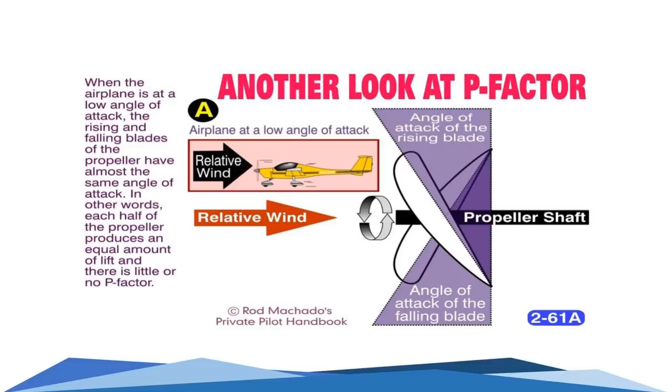Now, if we were to look at it in another way, and remember that all these are kind of exaggerated, when the airplane is at a higher angle of attack, the descending blade has a larger angle of attack compared to the rising blade, right? So that difference is what gives us that P factor, okay?

All right. Next, the last ones that we want to cover here are the aerodynamic forces within a maneuver. So we have specific forces anytime that we're in a turn. When we are in level flight, and hopefully when we consider it straight and unaccelerated level flight, lift is going to equal weight, meaning that we're not climbing or descending. When we start to turn, what you're going to notice is that we have these different components, which is what is considered a vertical component of lift or a horizontal component of lift.

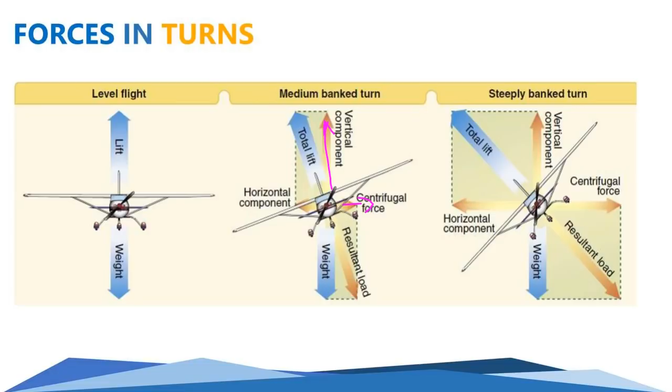Now, no matter what, vertical component of lift is basically just straight up from the aircraft. Horizontal component of lift is right or left of the aircraft horizontally. Whether it's horizontal or vertical, you basically add those two together and you get total lift. But once again, that's above and beyond this class. What we're showing you is that our total lift, or the lift that we need, increases the more that we bank, all right? Because basically our load factor increases.

So when we have an increased load factor, meaning the increase of weight, that's what's going to cause that airplane to stall at a higher airspeed, because now we've got more weight with less lift, right? So that's what we're talking about. What you're going to notice is that in the FAA test, there's going to be basically this stall speed and load factor chart. So this is another way of looking at it. And they'll basically tell you that you have an airplane in a 60-degree bank. What would be the load factor?

Well, in this case, I can go to my bank angle of 60 degrees, correspond that to 2 G's, which is here. And I can tell you that it is 2 times that of gravity. So if I had a 1,000-pound airplane, I would multiply that by 2, and guess what? My airplane now weighs 2,000 pounds.

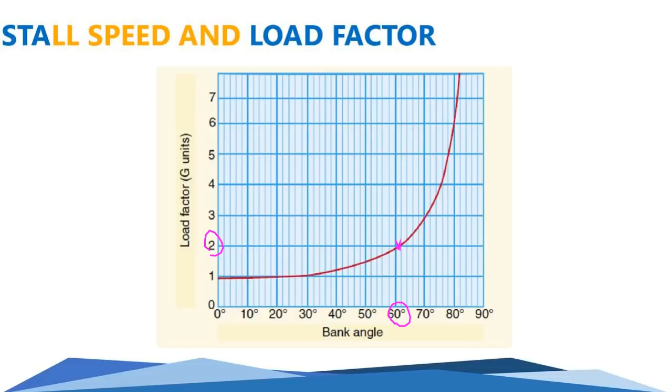Now, the last thing that we want to talk about here is the rate of turn or radius of turn. I'll show you a cool little spaceship one that I found. So this is really referring to the amount of time that it's required to complete a turn, right? So it varies depending on our actual airspeed. If I maintained a constant airspeed, which is this one up here in number 1, but I changed my bank, this bank that's giving us a tighter turn is a 30-degree bank. This one, which is not giving us quite as tight a turn, is 20. And this one, which is giving us a pretty wide turn, is 10 degrees.

This is the equivalent of turning your steering wheel. How much do you turn your steering wheel? Do you turn it 1 inch? Do you turn it 3 inches? This one at the bottom in number 2 is taking into consideration the same angle of bank, but we have different airspeeds. So what we can see here is the faster that we go with the same angle of bank, this was at 60 knots, the wider our turn is. Now, if we were to slow it down all the way to 40 knots, we can actually make a much sharper turn without having to turn the airplane more.

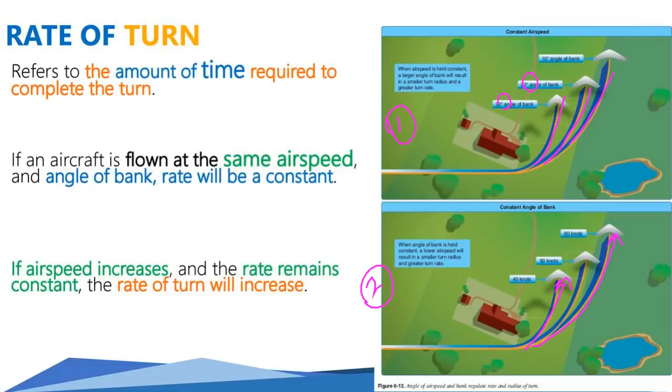So an easy way of looking at that is an increase in airspeed is going to result in an increase in the radius of the turn, and an increase in the angle of bank results in a decrease in the radius of the turn. So the sharper that I roll into or bank into that turn, the smaller this little arc or radius is going to be.

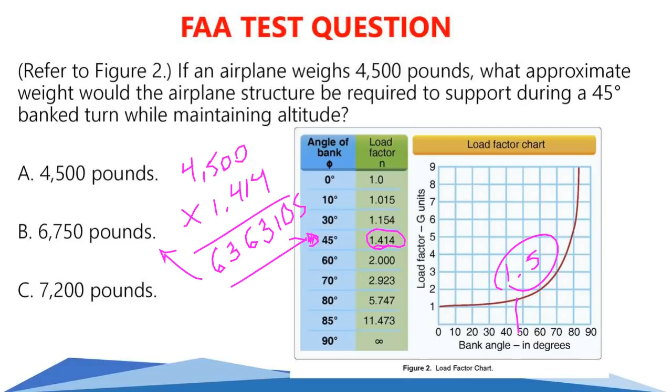If you wanted a less accurate way, and kind of the way the FAA is doing it, if you were to look at this chart here, you can come up with roughly 1.5. And if you multiply 4,500 pounds times 1.5, that gives you 6,750. All right. So with that, let me go ahead and reset that real quick.